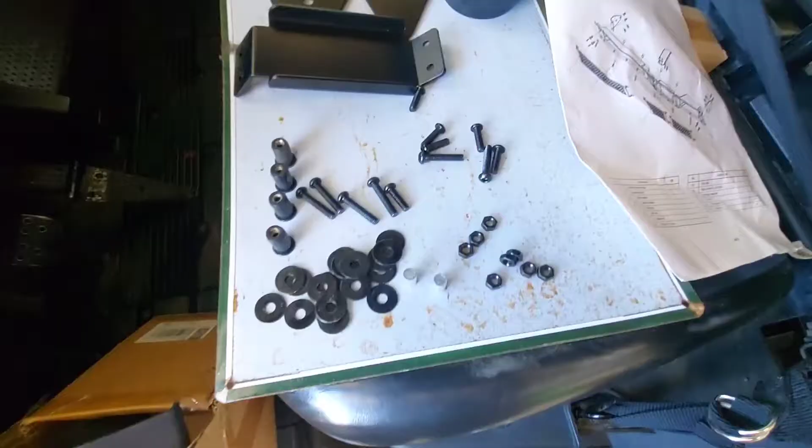So this is all the hardware. I took it out of the bags. You have your washers, long and short screws, nuts. These are 2 spacers that go in the center, and these are also what hold the brackets on. If you hold these brackets and you get this kit, video doesn't give it justice, but they're built sturdy.

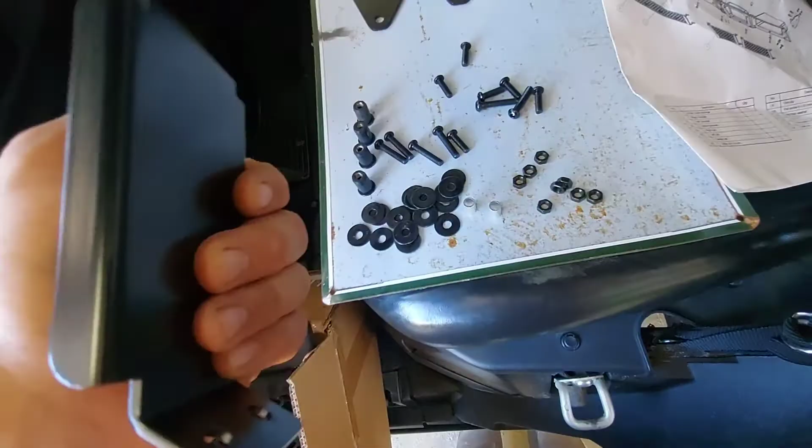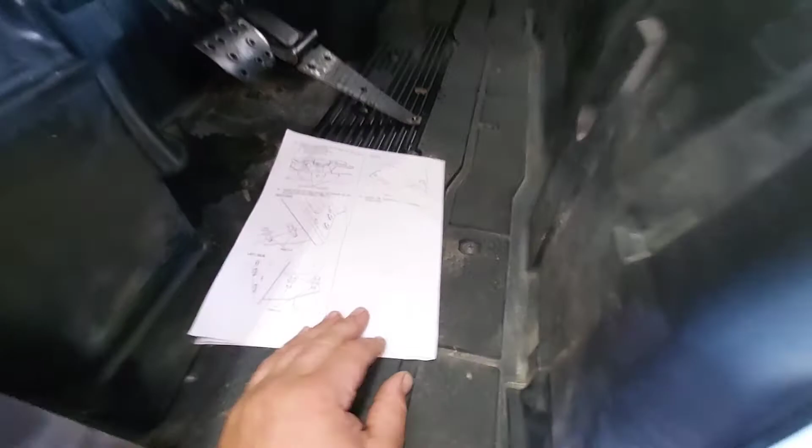So it does come with directions, pretty clear. Everything's labeled and detailed, everything you need to know, I already went over that. So I'm about to add my brackets to the cubby hole or dash, extra dash mount. And then I'm going to go ahead and remove all my screws and clips, and we're going to put it on.

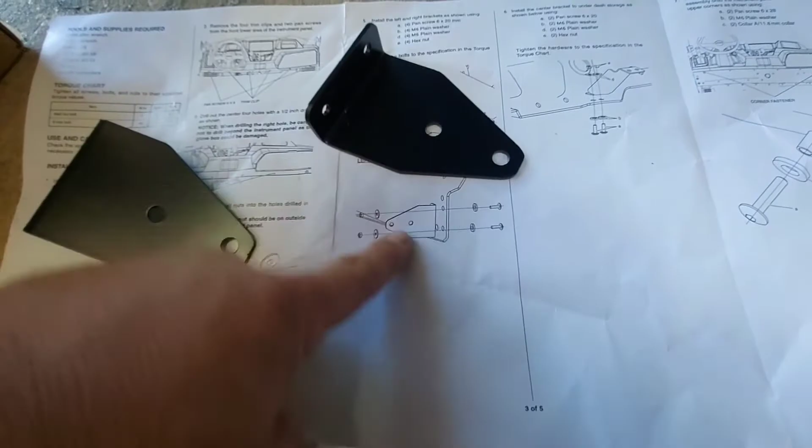Notice when you are installing the brackets, the longer flat side goes on the bottom, the shorter goes on top. The short screws go on the brackets on the sides, and you have a washer on the front, a washer on the back, and then a nut. I'm going to get some Loctite and put it on there just to make sure they don't back out with all the riding around bumps and stuff.

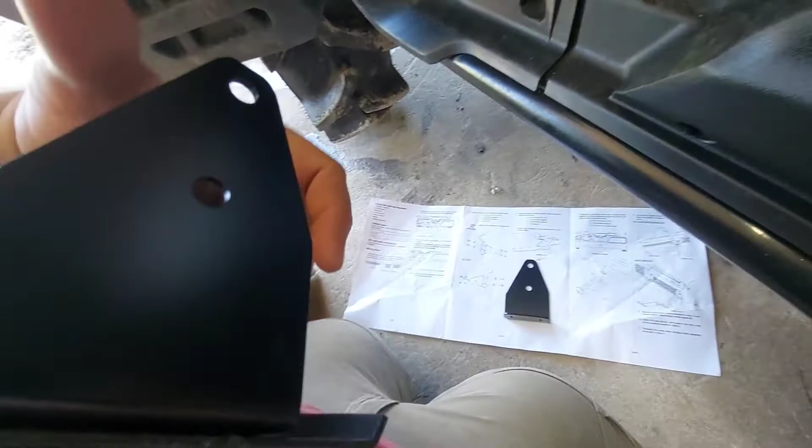So this is the right side bracket, and again, the flat side is on the bottom, the short side's on top. So I got both side brackets and the center bracket on, and that's what it looks like.

Now we have to take out the 4 pins and drill out the holes and put these rubber grommets in so we can put screws. Like I said, a 1/2 inch drill bit, then you get the rubber grommet, you put the metal in first, and you want the flange part sticking out, kind of a little twist when it goes in to help it slide up in there.

It's still a little tight. I might have to address it a little bit more. Oh, there it goes. So here you go, it's at 1/2 inch, and then you push it, and the flange part needs to be on the outside. There's 4 of them: 1, 2, 3, and 4.

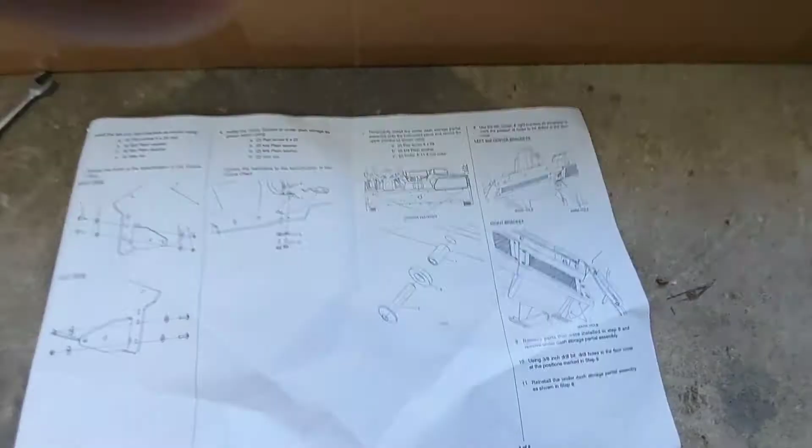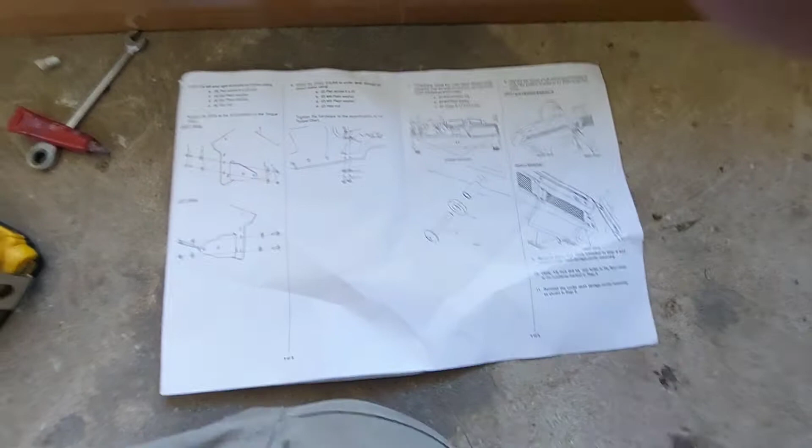So on the left and right corner, this is what it's going to look like. Instead of using the original hardware that came out, you're going to put back the new screw, the washer, and this retainer there - it's a collar.

Alright, so what I did to get all the holes lined up for the brackets, I got it partially mounted, tightened some of these up, and then I drilled 1 hole for the bracket up here. That way it holds it where it needs to be.

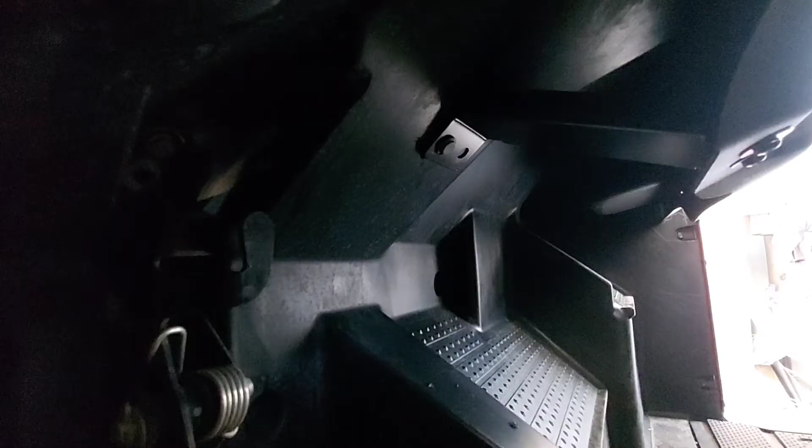And then what I'm going to have to do is take it back off. I'm going to mark these brackets up here on both sides, then drill the holes, and mount it all up. But it is looking clean.

Also, make sure you pull out your rubber grommet for your cigarette lighter there, so you don't get it stuck behind there when you put it up.

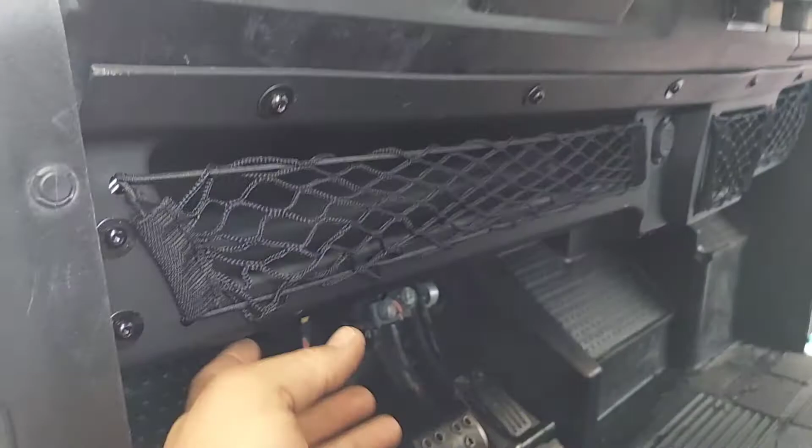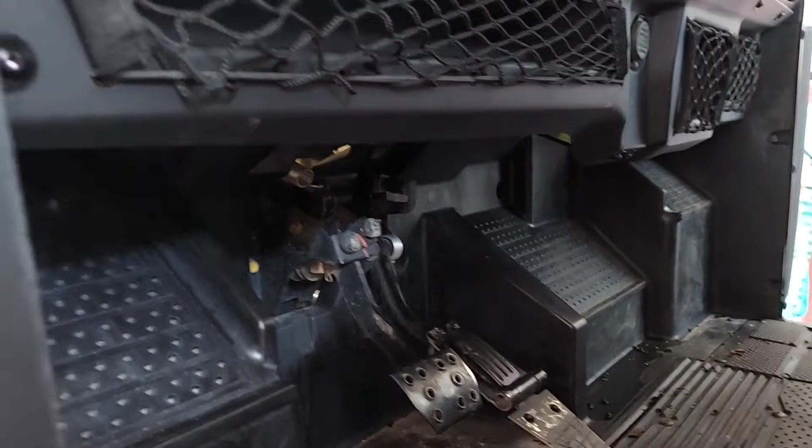But man, this is awesome. We're all finished up here, I got it all installed. The worst part about this whole thing are these brackets on the edges, the ones you install on both sides. The center bracket's easy, you can get to it, but this is difficult, putting it up here and trying to mark it and line it up. I'd say that's the worst part about it.

But it's not a design flaw. They did the best they possibly could for what they had, because they gave you as much cubby space as possible, and then putting the brackets on there kind of sucked because it takes away your cubby space. They possibly could have done like a drop bracket or something to come down a little further, but definitely I like it.

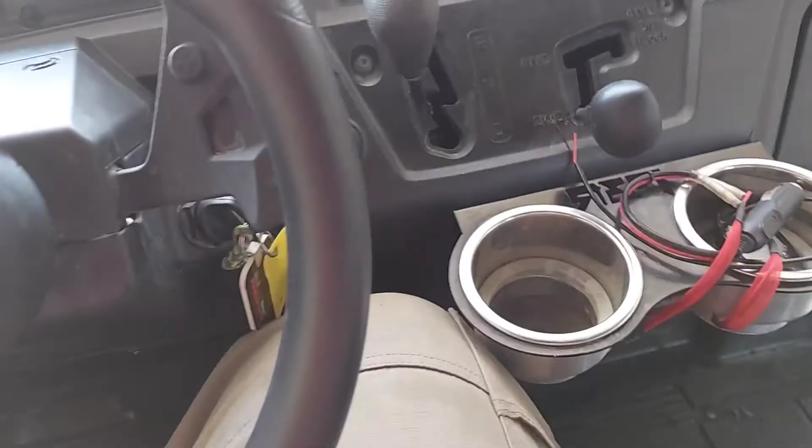I'm gonna climb in real quick. I'm a pretty big guy, if you watch any of my stuff, as you can see my knees are maybe 2 inches from there. I'm about 6'4". I'm excited about it because it transforms the cab.

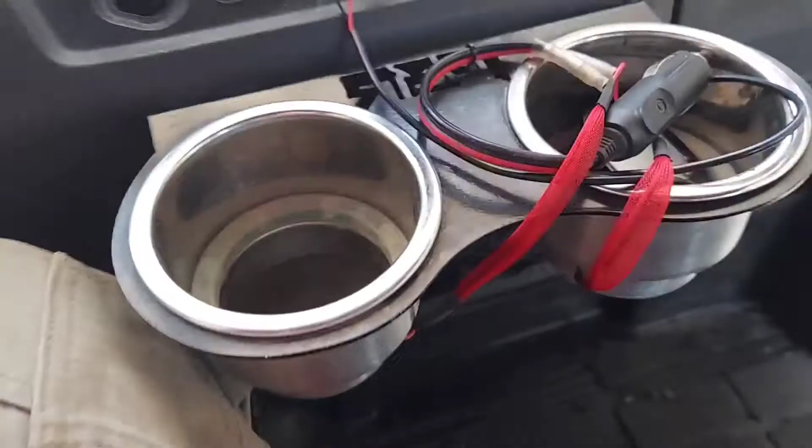Once you install it, you'll understand what I'm saying. Just write my foot up here, I have no problem with my foot there. I have no less room than I would for my foot. Nothing's affected, you don't lose any space that you would think you would lose.

Make sure, like I said, you pull your grommet through. I'm telling you, it finishes the cab out. I'm very excited about it, it's exactly what it was needing.

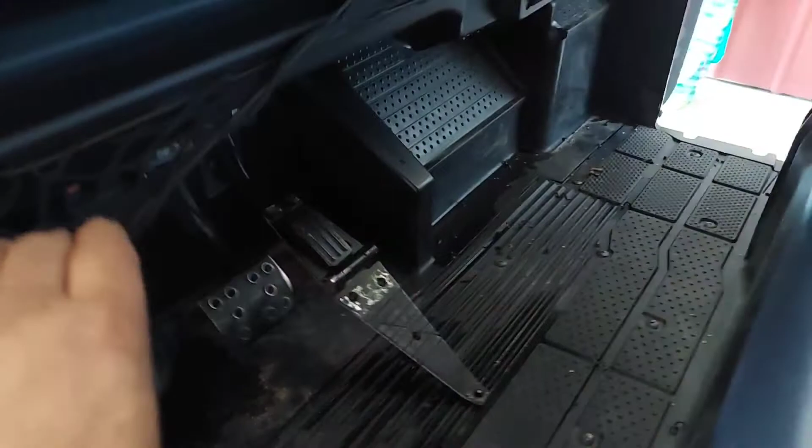So it's got little nets and everything, you can put some stuff under there. A pistol will fit under there for sure, you put your... I have a Glock 43, it'd fit in there easily.

Ammo, if you're hunting, that was another thing. When I went squirrel hunting, I had this stuff that's loose and trying to hold this and my gun and magazines. Flashlights, it's perfect.

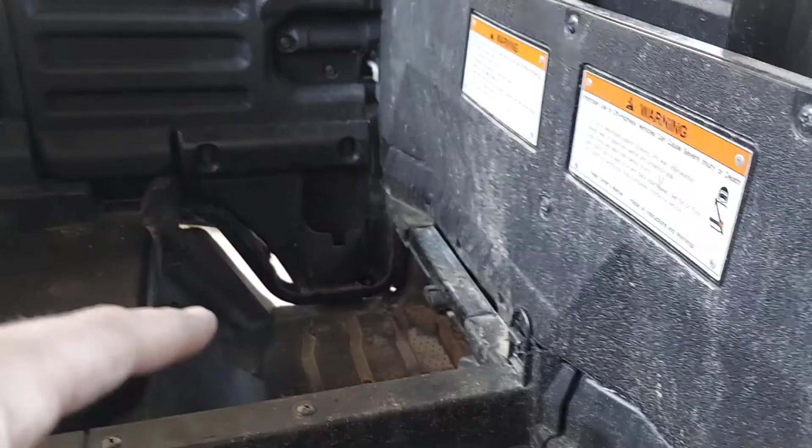It should have come with it. Also added the cup holders back here for the kids, we have this because we've got kids and it's a family vehicle.

All the time the kids have their snacks or stuff up here and extra things, or their shoes or socks, they take stuff off and it's all in the floor, and it's aggravating. Kids' shoes, you wouldn't think of that, but I'd fit the kids' shoes in there easily. Socks, this is a shallower one, but it could definitely fit snacks and stuff for the kids.

I'd say that fits about 3 or 4 water bottles in there, it could definitely get more water bottles over there. Just whatever, I don't know. I'm kind of rambling on about it, but I'm just excited because it's what we needed, and it finishes everything out. I like it.